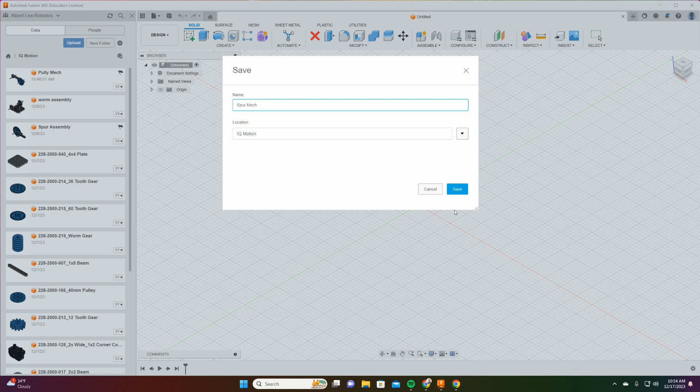The first thing we want to do is, we don't want to create inside any of our IQ parts because that will change the actual part itself. You can see we've got some different ones up here. I'm going to create a new one, save this, and call it Spur Mech, since this is our spur mechanism. I'm going to save it in those IQ parts that I downloaded. So here it is, I've got my first one. Now we're creating our assembly.

We start with our 1x8 beam, just like we did for the pulley assembly. I'm going to rotate that up 90 degrees so it's set up the way I want it, and hit OK. You don't have to do this piece, but I like to ground it just to make sure my parts don't move on me. So I'm going to right click, ground it, and my part is there.

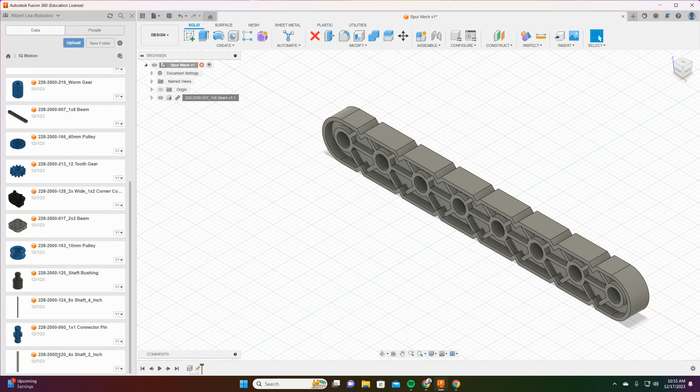Now we're going to bring in our 2-inch shaft. I've got the 2-inch shaft, and I'm going to rotate this one down, slide it out and over, and line it up. I've done this a couple times, so here's a hint: one is going to go in this 2nd hole, which will have our 12-tooth gear. Then for sizing, we're going to go to hole 4, so 1, 2, 3, 4, which is where the other shaft is going to go for our 60-tooth gear. I'm just going to put that there and hit OK.

Then I'm going to click on this end, select the part, and hit move copy. I'm going to create a copy and drag that one out. The only thing that does is save you from sliding it on its end again, but you can certainly do that manually. Just a heads up, I'm lining it up at this 4th hole, a little bit of a cheat since we're getting ahead of ourselves on where it's going to go.

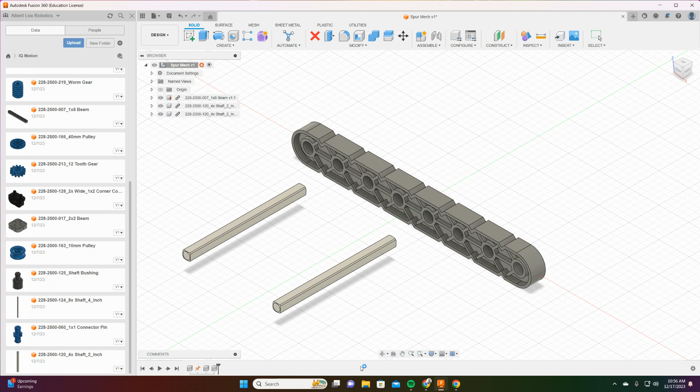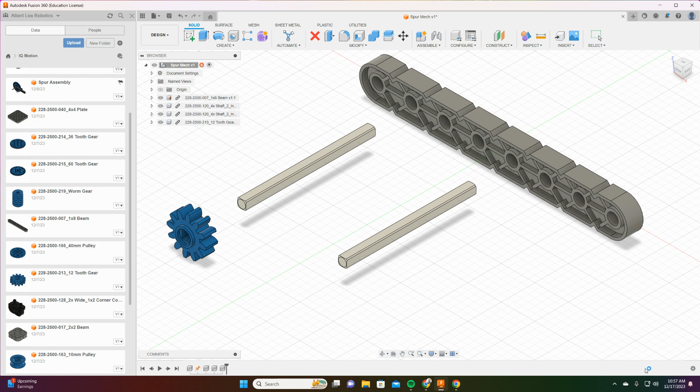Then I'm going to bring in our 12-tooth gear, zoom out a little bit, rotate this down and then up on its side 90 degrees. I'll pull that over here onto this side and hit OK. Then we need the 60-tooth gear, which is going to be here, so we'll pull that in and rotate it on its side as well.

You can do your joints like this piece, doing it this way is kind of best practice, though you don't have to if you set your joints up correctly. As you can see here, I've kind of got everything already lined up right, and my gears are kind of lined up the way they should be just by getting this set up. But you can also leave them all laying flat and do all your joints through afterward. It just makes it easier, I think, when you're putting it in here.

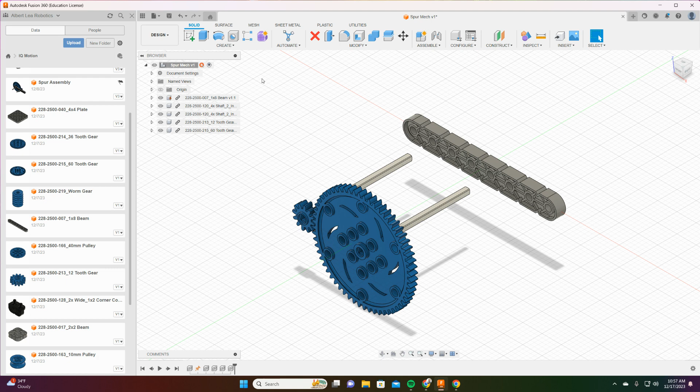So now what we're going to do is start to put everything together. That's going to be everything that we need, so I'm going to create my joint.

For this one, I'm going to create our motion joint. This is going to be our revolute joint, for our axles. What I'm going to do is rotate this around to the back. I'm just going to do the other axle to show you guys what we're going to do here.

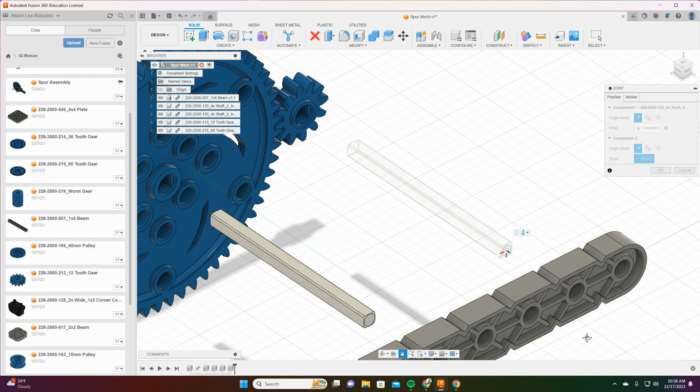I'm going to do this centerpiece. You can do either side, I'm just showing you from a different side here how to do it. I'm going to click that one, and this one is going to go into this second hole here. I'm going to get right in here and hit that second hole. So we've got it there.

Then I'm going to move this in, 0.3 inches. So we'll do that. There it is, so we've got that in there.

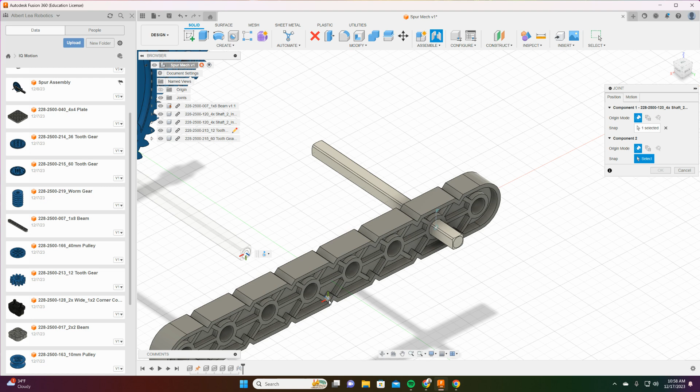Then I'm going to do the same thing. I'm going to create a joint - it remembers that it was revolute, so I'm going to do my revolutes first. I'm going to do that one on the end. This is going to go into that 4th hole in - 1, 2, 3, 4 - put that right into that center hole. There it is. And then I'm going to move this in that 0.3, negative 0.3 again, and hit OK. So we've got them - there's our 2 revolute joints.

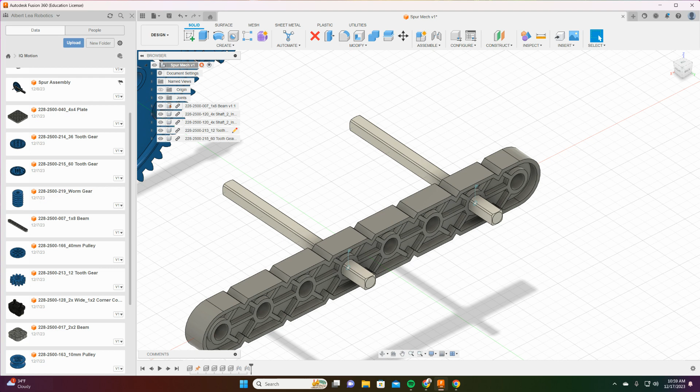Now what we're going to do is put in our axle, our spur gears. I'm going to go back to where I'm at and put those onto this other side. So I'm going to do this first one - go in here to create my joint, and change it from here to a rigid.

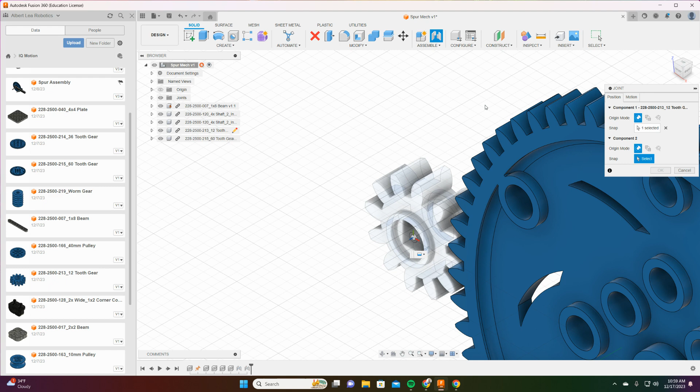I've got my position, so I'm going to come over here to this one - this is going to be our position. I'm going to select my component one, so this is where I get to this. I'm going to hold down the control key so I can get the centerpiece - click the center of it, so it's going to go center to center. Then I'm going to click on the center of this axle that lines everything up and spins it.

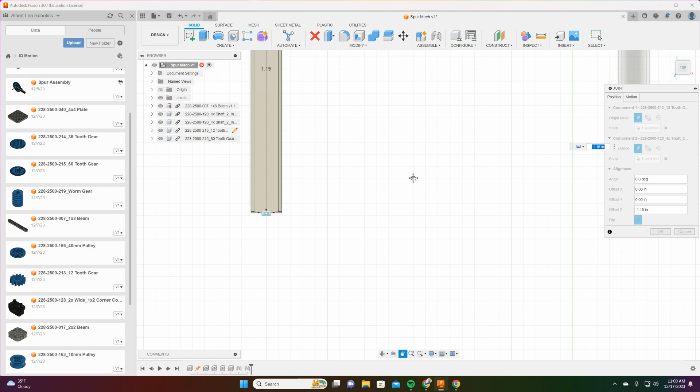Then I'm going to move this in - it's going to come down here. Let's look at the top here, see what this top is going to look like. I want to get this lined up so it's nice and close there. So we are negative 1.15. Let's do that - negative 1.15. Perfect, okay, I'm going to hit OK. So there it is.

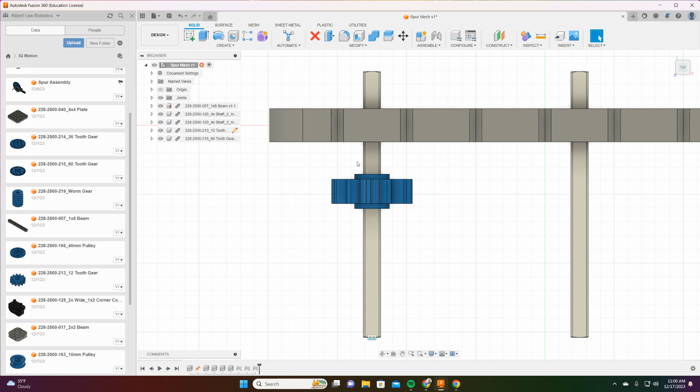One of the things we do is if your gear is too close, it's going to rub on here. If you wanted to put extra spacers or anything like that, as we get into more models, we can do that. We don't need to do anything there with that yet.

So now we're going to do the same thing with this one. I'm going to create my joint and assemble my joint - it remembers that it was rigid. I'm already set to snap my select on my first one. So I'm going to come down in here. I'm going to find this - this is that inside piece here.

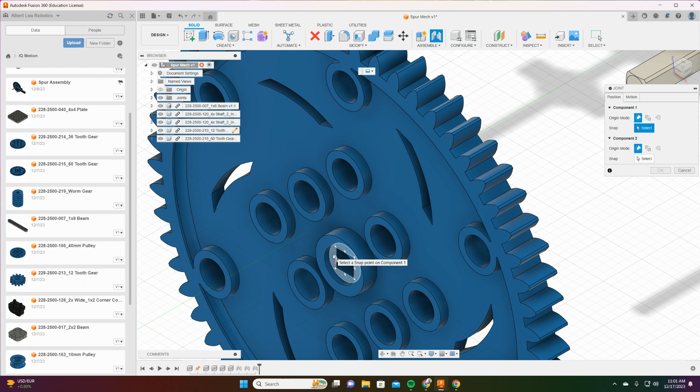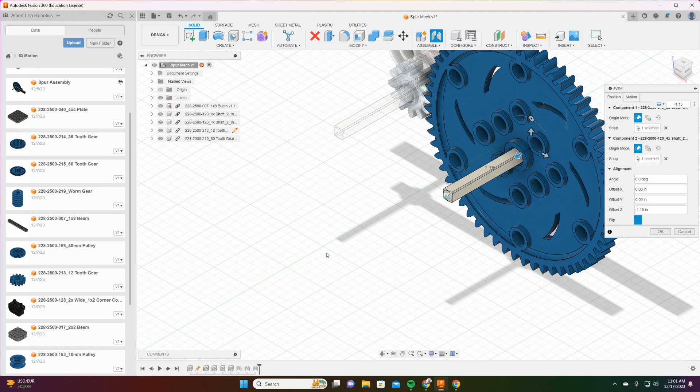Once I get it, I hold down the control key, then I can get to the center, hit the center of it. Then I'm going to find my second one, go right to the center of it - it rotates it. And I'm going to do this, that negative 1.15. I'm going to look at this before I finish this off, from the top. And they should be - look at that, they're lined up perfectly, which is exactly what we want to do.

Now, one of the things that we want to do with this is when we look at this, watch what we want to do. I'm going to go to the front here, and what we're going to do is rotate this on. Mine lined up actually pretty good.

I'm going to change this just a little bit. I'm going to come in here and rotate this just a little bit. You might want to do this to get your model, and this adds that realism or that professionalism to it.

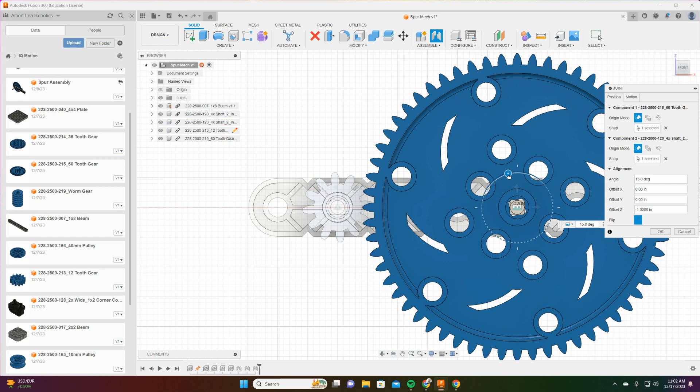So I'm going to rotate this just a little bit so I get it to where I want it to be. I'm going to keep this, lock this in. We're going to rotate it here in just a second, so we're going to get it to there, and I'm going to hit OK. So that's locked in there.

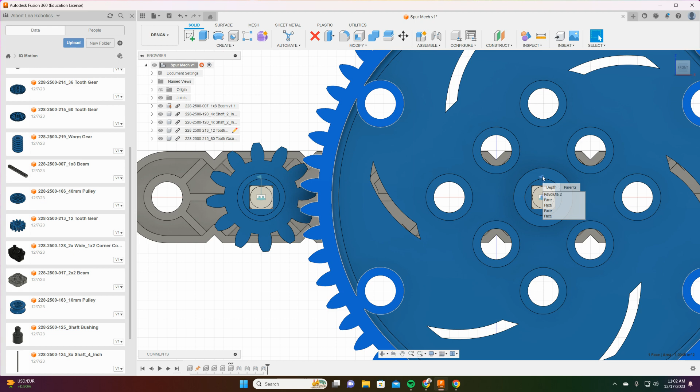Okay, so now what we can do is if we look at this, we're going to get this set up here in just a second, but I can rotate this just a little bit if I needed to. So what I can do here is if I grab this rotation, I can get in here and do some rotating of it. Let me go to this. I'm going to try to get this revolute, so I'm going to find this joint. This is this one.

And so now what I'm going to do is, if I turn this, I can rotate this to get my teeth lined up so that my teeth are set where we want them. And then what I want to do is capture that position, so now that sets it up so that my teeth are lined up perfectly.

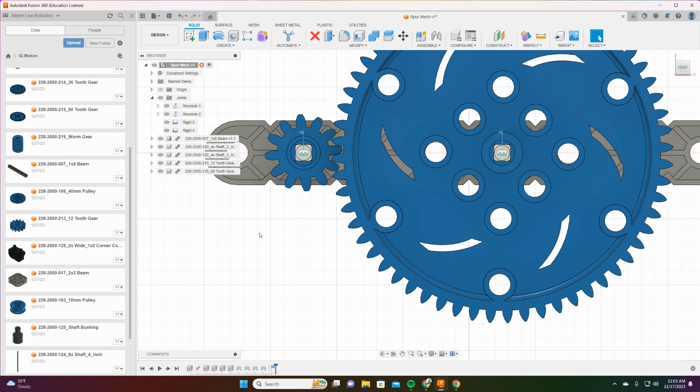And that just, your motion will, when we set up and create this as a professional model, you want everything to come together good, so your gears would not spin if the teeth aren't lined up right. So we want to make sure that we do the same thing.

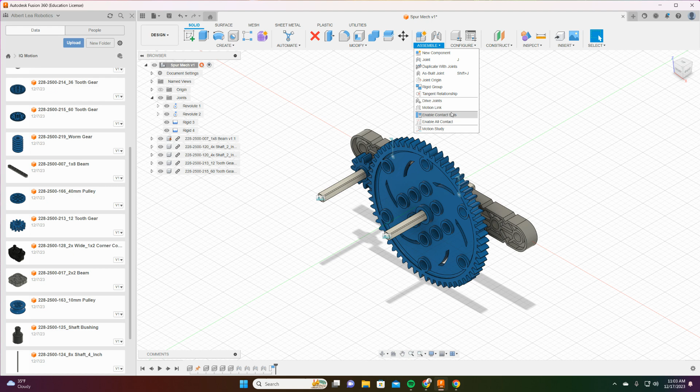So now what we're going to do is we're going to create that motion link. Again, you can do it by clicking on these, or I like to do it from our browser menu here and open up the joint tab so that I can look at and get this. So we're going to come in here, we're going to hit assemble, we're going to assemble a motion link. And we're going to select our first one, then I'm going to do my second one.

And you're going to notice, here's the first thing that we notice with this, if I'm looking at this, is they're not spinning the right way. So we've got the one that is going, if this one is spinning this way, this one should actually spin the opposite direction. So what we're going to do here is for this Revolute 1, we're going to reverse this first one. So that's going to be reversed.

The other thing that we've got is this one is spinning way faster than it should be. The small one should be the one that's spinning faster. So 60 tooth to 12 tooth, so we reduce that down. It's 1/5, so this should be spinning at 1/5 the speed of this other one. So 360-degree rotation divided by 5 gives us 72. So we're going to change that to a 72, and we're going to click off, hit OK.

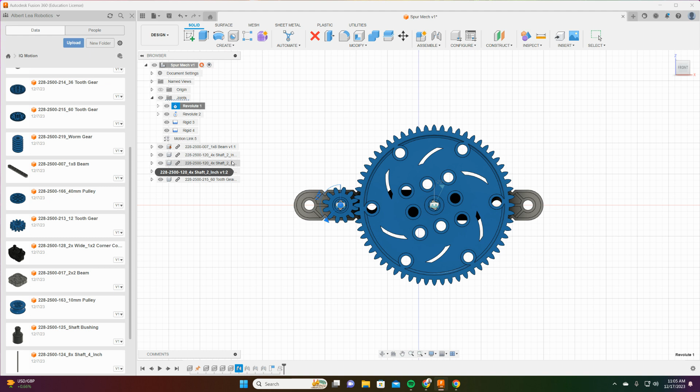And so now when we go in to look at our revolution, I'm going to go in here to animate this joint, animate this joint relationship. There it is. So now we are turning. If I turn this one way, the other gear is turning the opposite direction, and it's rotating at the speed that it should be. So that is giving us our joint relationship force, giving us what we should have for it.

Okay, so that's going to be everything that we've got for it. So now we've got our second joint relationship, so we're going to go ahead and hit save. What I'm going to do is save this, and we're going to say this is complete motion, and that we've done reverse and setting up our gears. We're going to make this a milestone, and we're going to call it finished. There it is, and we're going to hit OK.

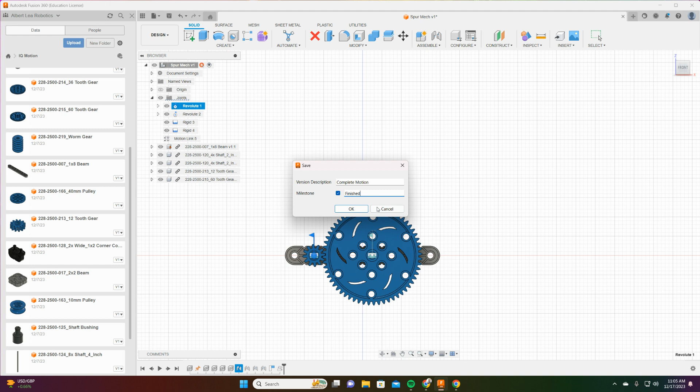And that is your spur gear done with motion links for the gear assembly, and so we got everything set up.